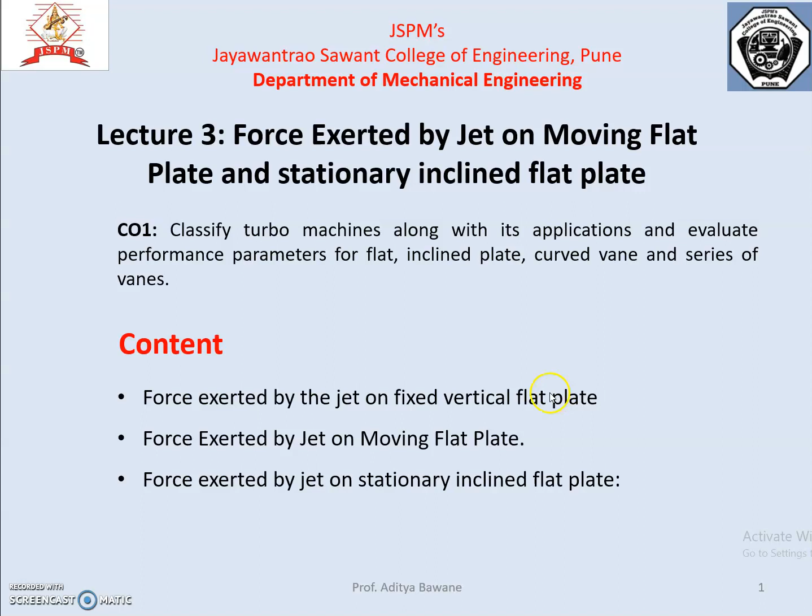in which we studied that whenever the water jet strikes a fixed vertical flat plate, its initial momentum at the striking position becomes zero, that is the final momentum is zero, and the force is calculated by the formula Fx equal to rho a v square, which can be derived from the momentum equation, that is initial momentum minus final momentum. Fx equal to initial minus final momentum.

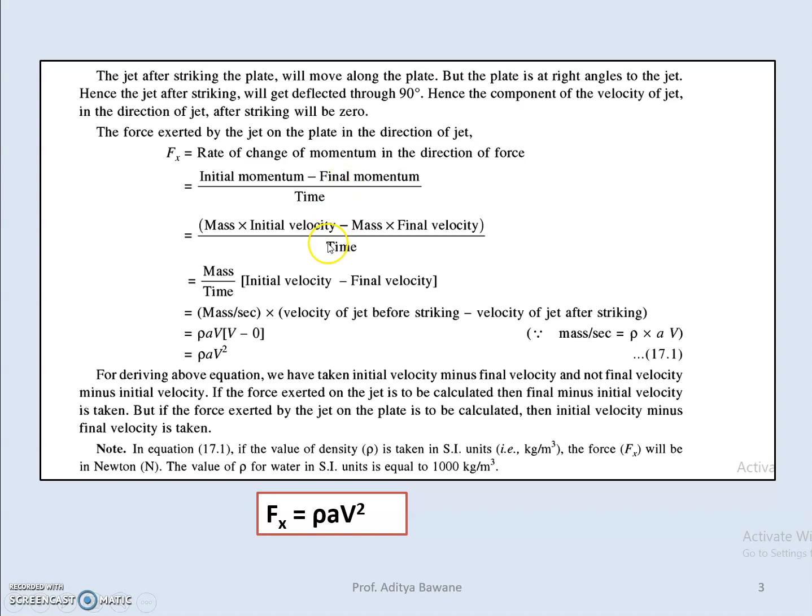Now let us study the force exerted by the jet on a flat plate moving in the direction of jet. So let us assume velocity v of jet striking the plate, and the vertical plate is moving at velocity u. So v is the absolute velocity of the jet and u is the absolute velocity of this vertical plate. Now whenever this jet strikes the plate, it will move with these two velocities, so relative velocity comes into the picture.

So what is the concept of relative velocity? For example, if you are moving on two bicycles or two motorcycles in the same direction at the same speed, you will assume that both are stationary, and if you are moving in the opposite direction with different speeds, then your speeds will get added. So that is nothing but relative velocity.

Whenever we travel by train and another train crosses at the same speed, we assume that train has a higher speed than us, but that is not the case. Whenever two trains cross each other with different speeds, their speeds get added, and when two trains move in the same direction, their velocities get subtracted.

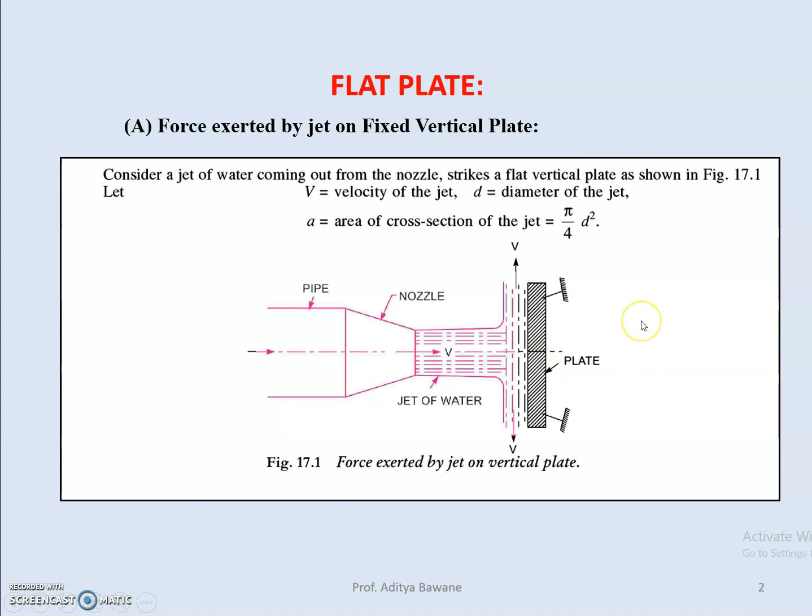In the previous case, when the plate was fixed, there was no work done since the plate is not moving, so work done is 0. In this case the plate is moving, so there will be work done. How will we calculate it? Work done equals force into displacement. Work done per second is force into distance per second. Force is Fx along the direction of jet, and distance by time is velocity, and the blade velocity is u.

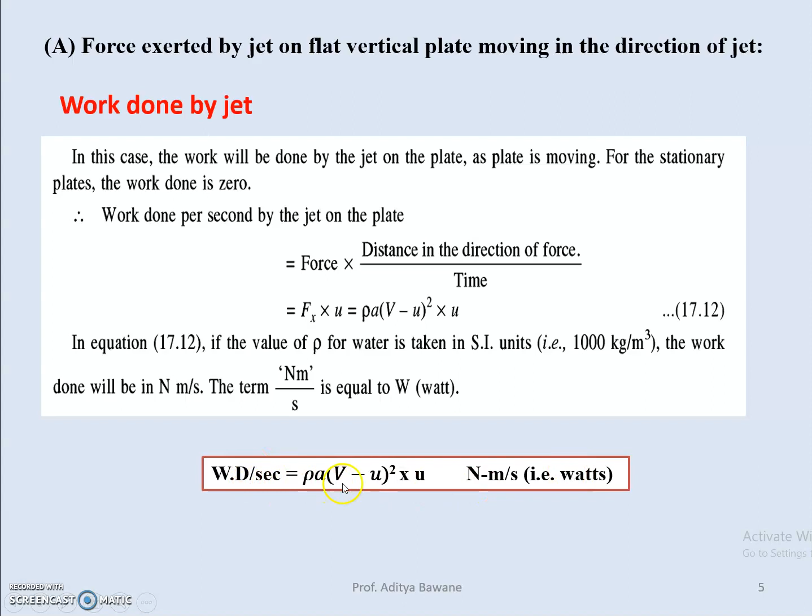The SI unit for this is Newton meter per second or joule per second, or watt. So work done per second is equal to rho A (V minus U) square into U.

Now the next case, that is the inclined plate. Earlier we studied the vertical flat plate. Now in this case the plate is inclined. Again let us assume that this is the velocity of jet. This is a fixed plate, so u will be 0, and its inclination is angle theta, so this will be 90 minus theta.

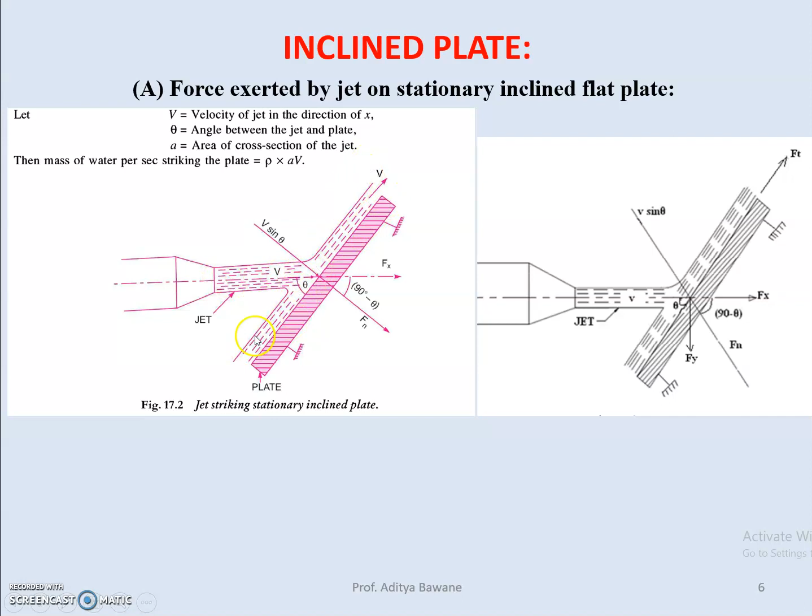So whenever the jet strikes this plate, it will move along the upward direction and downward direction. Next, here the picture will get cleared.

Whenever the jet strikes, the velocity or flow will move in upward and downward directions. So the component: this will be theta, so 90 minus theta. So this will be 90 minus theta. So Fx, V sine theta along the x direction, which is normal to this plate. So the V component, that is the normal component of force, is nothing but V sine theta for this plate.

So what we are assuming in this case: whenever the jet strikes this plate, the plate has a smooth surface, so there will be no loss of velocity from inlet to outlet. So whatever velocity strikes this plate will remain the same at inlet and exit. So let us find out the normal force. Normal force will be mass of jet striking per second into initial velocity minus final velocity.

So the initial velocity of the jet before striking in the direction of the normal, that is normal to this plate, and the final velocity of the jet after striking the plate. We know the normal component is V sine theta, and whenever it strikes, it will not move along this direction as the plate is stationary. So that velocity V2 becomes 0. So Fn equals rho a V into (V sine theta minus 0), as the final velocity becomes 0. So the final equation is Fn equals rho a V square sine theta.

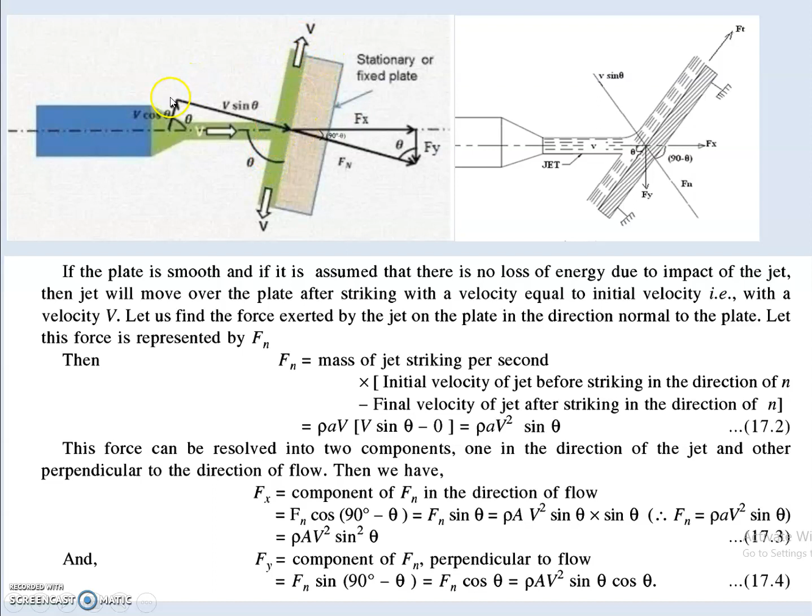We know momentum is nothing but mass into velocity. So total momentum equals momentum 1 plus momentum 2, that is mv total equals mv1 plus mv2. Now what is m dot? That is nothing but rho a v, and a v is nothing but discharge. So rho into discharge, and v is v cos theta along the x direction. So along the plate it is v cos theta.

And for q1 and q2, that is q1 rho v and q2 rho v. Now in this case we assume there is no loss, which means v remains the same, so v gets cancelled, and the density of water remains the same, so density gets cancelled. So what remains is q cos theta equals q1 minus q2. Consider this as equation 1. Again, we know the total quantity in equals the outlets, so q equals q1 plus q2.

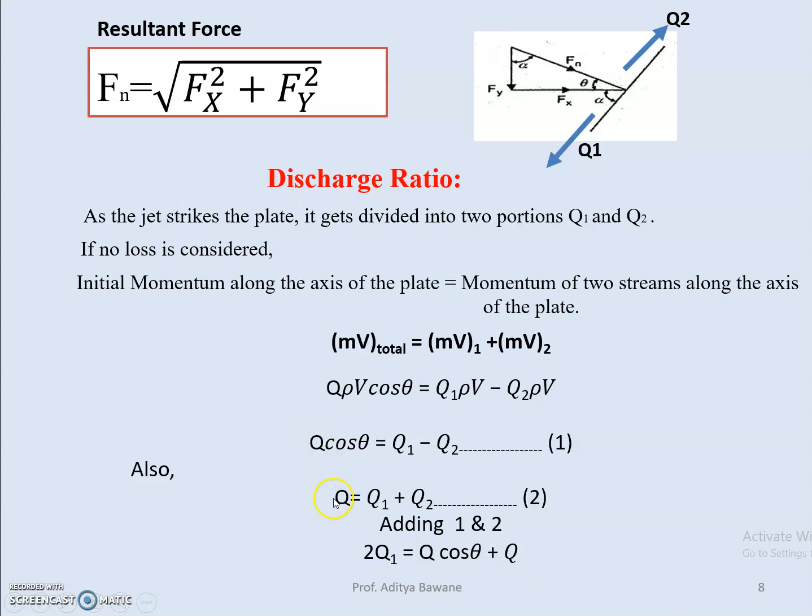So if I add equations 1 and 2, what do I get? q2 gets cancelled, giving 2q1, and on the other side q plus q cos theta. So 2q1 equals q cos theta plus q. Now q1 equals q by 2 into (1 plus cos theta). How does it come? q is taken common, so 1 plus cos theta remains, and the 2 goes to this side. Similarly, if we subtract equation 1 from 2, we get q2 equals q by 2 into (1 minus cos theta).

So if we take the ratio q1 by q2, what do we get? q1 by q2 equals (1 plus cos theta) by (1 minus cos theta). So the final ratio q1 by q2 equals 1 plus cos theta by 1 minus cos theta. Thank you.